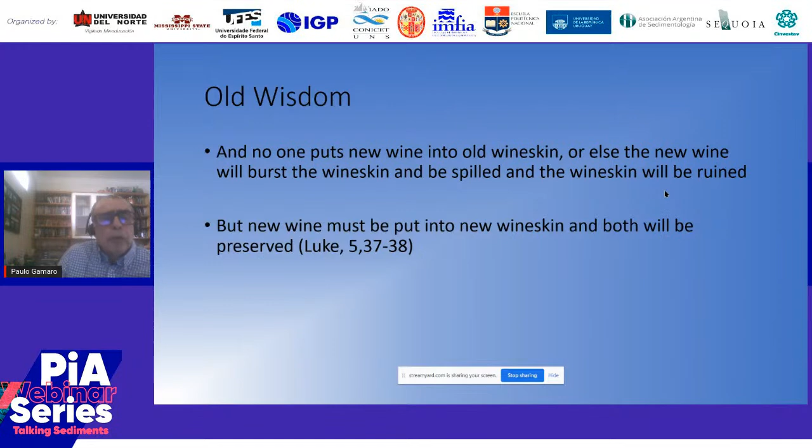Luke 5:37-38. Why did I put this? Because if we are going to use new techniques with the old rules, those old rules are probably not enough for us to understand and use them. It's like I have a cannon, a powerful weapon, but I don't know how to use it. I just know how to throw stones.

So we have to start seeing a revision of the old techniques. We have to see how we do things. When I say old techniques, I'm not saying they're completely unactualized, but I mean it's old because there is a new one. It doesn't mean it's not good enough. Again, it's still good for the use we used to do in the past. But when we have new techniques, this becomes old.

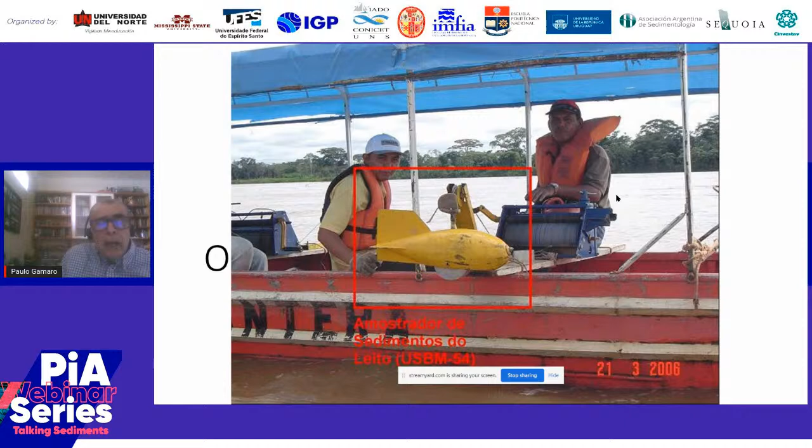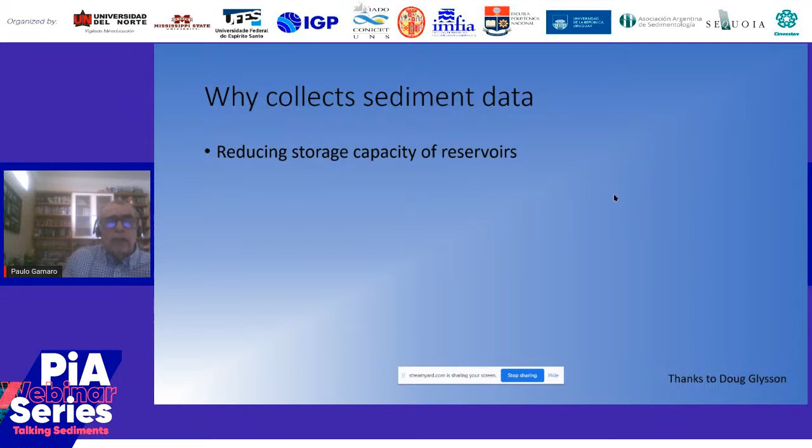So here are some samplers for bottom sediment. We have to come back to why we collect sediment data. First of all, sediment reduces storage capacity of reservoirs, and we are seeing this many times. This is increasing in our world. Why is that? Because human beings are changing the environment, and the sediment is going faster and faster to the river, to the water bodies, and so it is reducing or even completely turning the reservoir unusable.

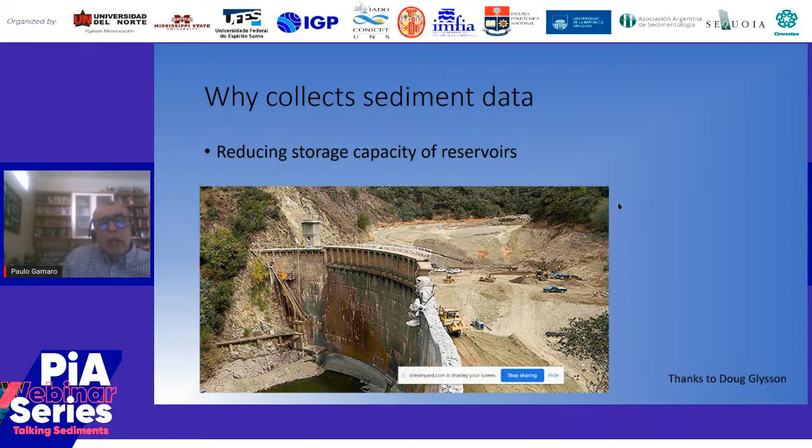Also, the sediment causes changes in channel configuration, slowing or halting either temporarily or permanently plant growth when deposited on productive land. Right now, when we see that the population of the world is growing and growing, we need more and more plant growth and yields and things like that. And sediment could ruin this in the long term.

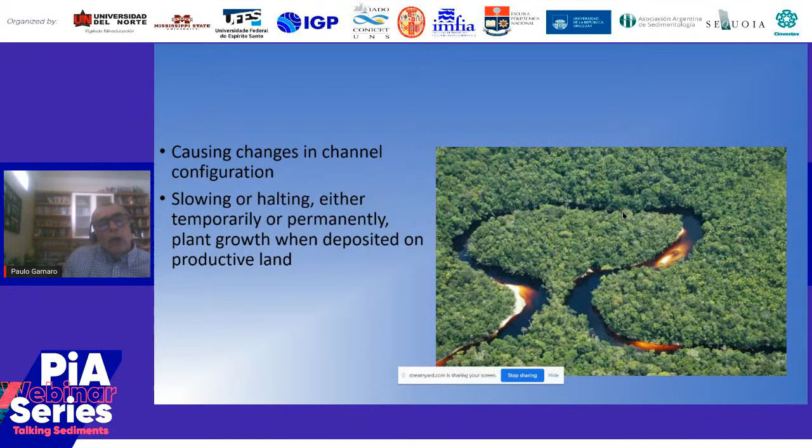We also have navigation problems here where I live. I live at the confluence of the Paraná River and Iguaçu River in the south of Brazil, bordering Paraguay and Argentina. We can see a lot of yield of soy, corn, wheat being transported, and this transportation comes by the river. Also in Paraguay, most of the transportation comes by the Paraguay River.

So we can see a lot of problems there, like sedimentation in the middle of the river where the barge couldn't pass by, the barge had to stop, and we can lose millions of US dollars every day.

So what do we need sediment data for? We need to understand how it works. First of all, the time distribution of sediment concentration and transport rate in a stream. We have to evaluate the sediment yields. We have to evaluate the erosion and deposition in channel systems, like this one I just showed you. The amount and size characteristics of sediment delivered to a body of water.

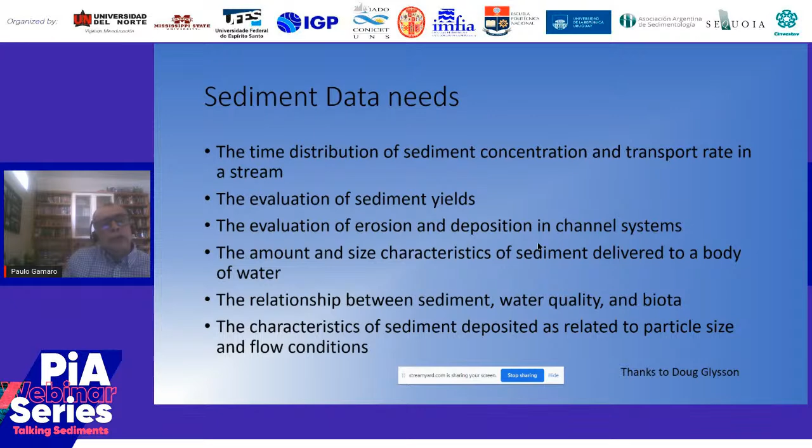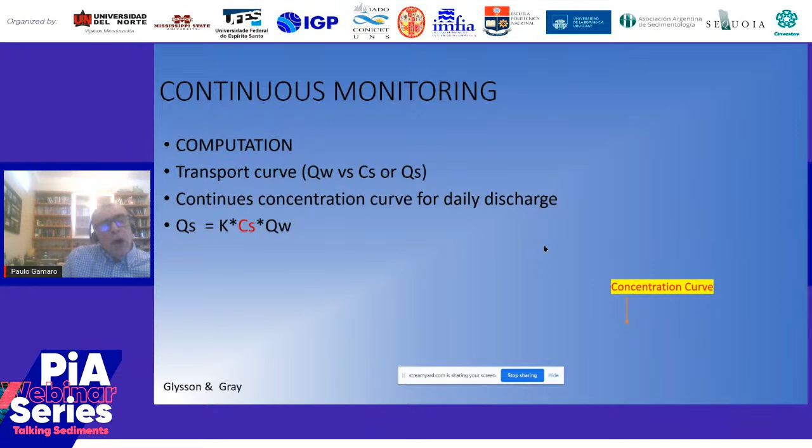So we have to monitor continuously. To monitor continuously, it's completely impossible to have measurements every day, every moment, because of time and because of the money that we spend to do this. So we use the computation of a transport curve or sediment curve to continue monitoring daily discharge of sediment on a daily basis. So here is an example of a water hydrograph and the sediment curve here.

This is in the middle of the Paraná River, just upstream of the Itaipu Reservoir. So let's see the difficulties to collect regular sediment data. We need a representative sample, which requires selecting a good site and understanding its characteristics, the temporal variability, the spatial variability, and sampling frequency.

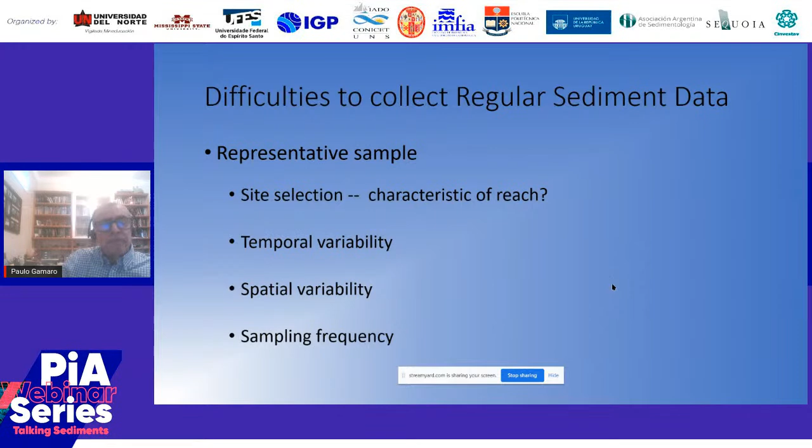So I'll show you some site characteristics about depth, which would be a problem to collect sediment. This is a very unusual place, in the Amazon River at the Itacoatiara station. We can see the depth is about 100 meters, and we have a lot of turbulence at the bottom that could affect the equipment's measurements. In this case, it's a very big problem to collect sediment with old mechanical meters.

The width is also about 2.5 kilometers wide. It's a very complicated situation for our measurements. And this is not only the Amazon River, but the entire Amazon basin. We have to face this to collect regular sediment data. Even in the Paraná basin we have this kind of problem, in the Paraná and some of its tributaries.

High water velocities, we can face velocities of about 2.5 meters per second. So when we are descending our mechanical meter, we have problems, especially in these high velocities. These high velocities are not only usual for the Amazon basin. We can find high water velocities in the Paraná River, Iguaçu River, and Paraguay River in some conditions, flood or semi-flood conditions.

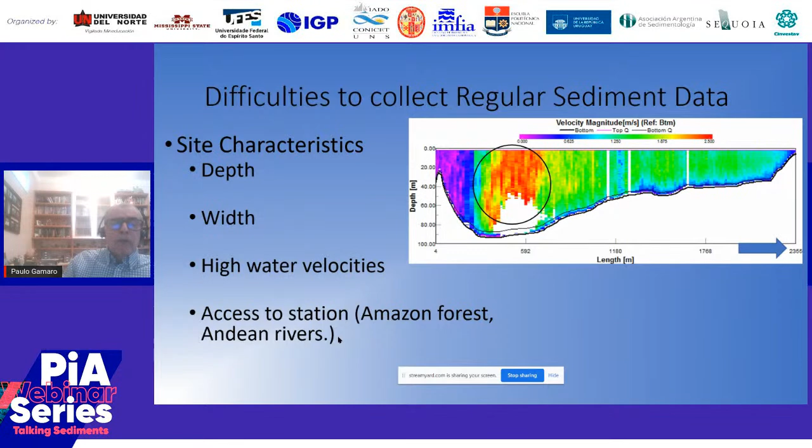So what we have to collect is a representative sample, a characteristic of the sample that is proportional to its occurrence in the local environment at the time of collection. This means every sample I collect should be proportional to the place where I'm measuring. A representative suspended sediment sample will have a sediment concentration and size distribution equal or similar to that averaged over the stream cross-section when the sample was collected.

It looks simple to do this, but when you go to the field, some places are very unusual and complicated to get a representative sample. Here is a well-known picture of different sediment diameters and how they occur in rivers: silts, fine sand, very fine sand, medium sand, and so on. It's well known.

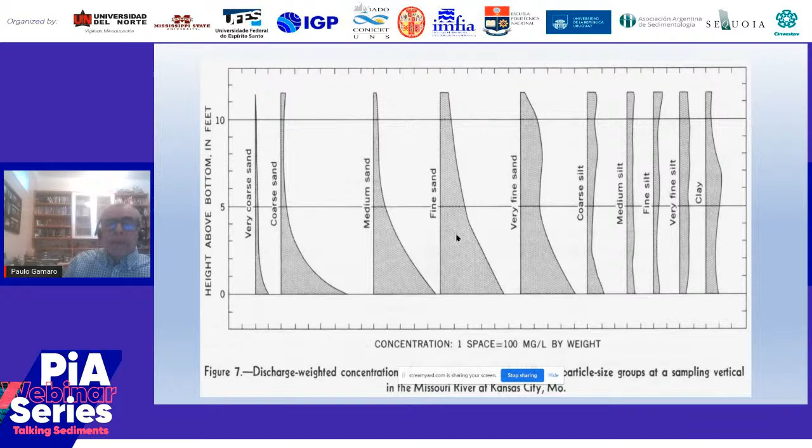We also have to consider that for silts and fine sediment, measurements at the surface don't differ much from the mean of the vertical profile. If we divide the mean concentration of the vertical by the concentration at the point, it should be around 1 — the closer to 1, the better. So you can see that for finer sediments, it's not difficult, even at 5 feet depth.

But things start to be completely different when we have coarser sediment like sands and fine sands. At the surface we see this concentration, and here we have the mean concentration in the vertical. We can see the quotient is about 5, 4, 1.5, 1.4, 1.7. This means it's not enough for us to just collect samples at the surface of the water.

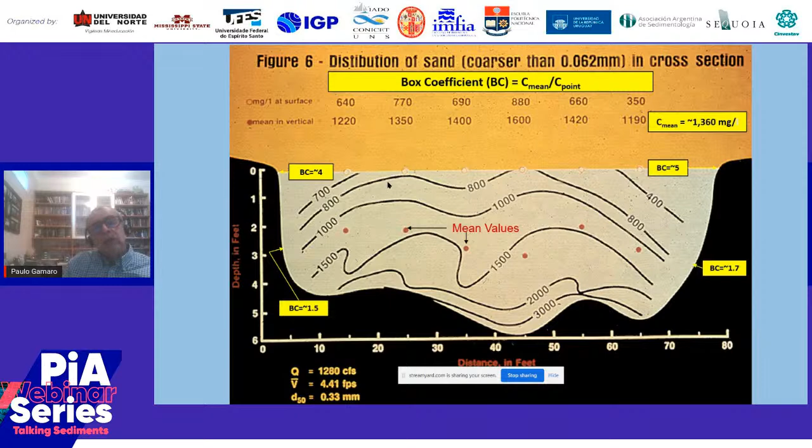What does this mean? It means that at many stations we visit every 3 or 4 months to do a complete sediment measurement, during this time someone goes and collects only a surface sample for measuring sediment. In rivers with coarser, sandy sediment, this is a big problem, a big error. I don't know about the rest of South America, but in Brazil, Paraguay, Uruguay and Argentina, we also have a lot of rivers with a lot of sand. So it's a problem to measure more frequently, and this is not always possible.

So we also have to see the relation between suspended sediment and concentration, and the relation with depth — turbulence maintains sediment in suspension. Fine sediment tends to be uniformly distributed in the water column. The concentration of coarse sediment may increase with depth, following Stokes' law.

It's okay, we can see this, but this is not very easy to understand in big rivers like the Amazon basin, the Paraná basin, and things like that. The sediments may be non-uniformly distributed in the cross section. This may be due to incomplete mixing, inadequate mixing time, weak turbulence, density gradients, and everything like that. We also have to understand the relation with the season, the flow history, man's work, and the changing environment around our section.

We can see some mechanical samplers. Here is one of the rivers of the Amazon basin, the Madeira River, one of the rivers that carries the most sediment in the Amazon basin.

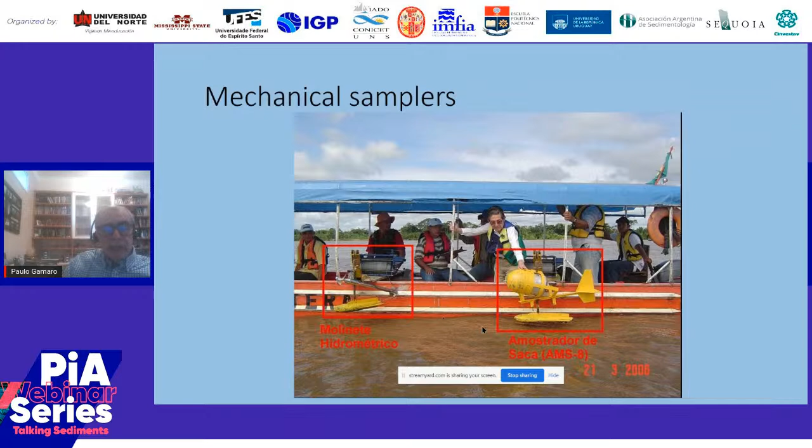We can see more samplers, and we can see that we have some boats not adequate for these measurements in low flow, low discharge. It's not possible to measure with this kind of boat in high discharge.

The other problem is when we are in the middle of the measurement, anchored in our boat, we start to measure, and some soy barge comes, and you have to move very quickly to not be hit by this barge. Or a ship - in the Amazon it's very common for big ships to cross the river during the measurements and things like this.

So, problems: a wide river sample may not be representative. When I say wide river, I'm talking about more than 2 kilometers wide. I give an example of the Solimões River, one of the tributaries of the Amazon.

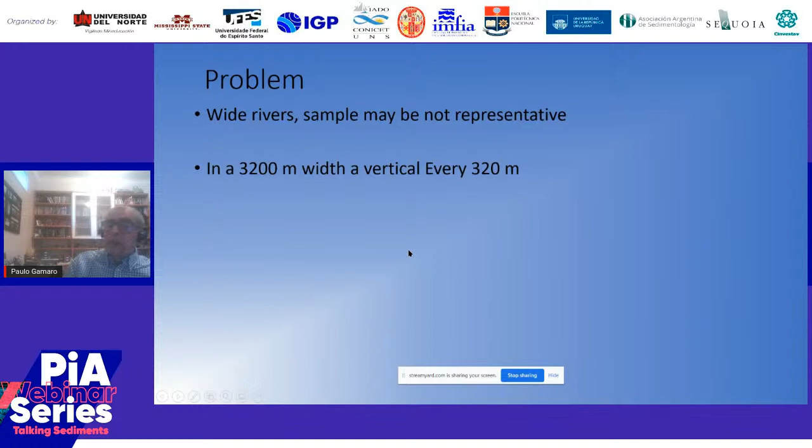We have a problem with measurements - we do not measure as much as we need, especially in South America. I don't know much about Colombia, Venezuela, and Peru, but I know about Brazil, Paraguay, Argentina, and even Uruguay. We're not measuring because we have problems with budget, low budgets for this. We have few technicians, few teams to go measure all the rivers, and we also have locomotion difficulties. We sometimes take many days to arrive at one station, especially in the north of Brazil.

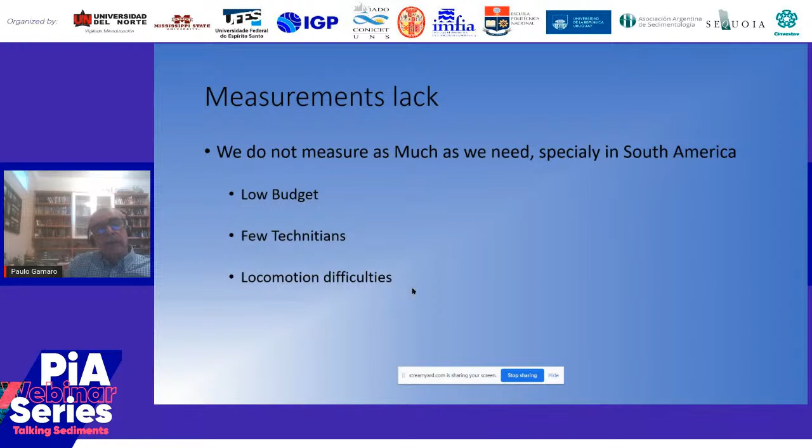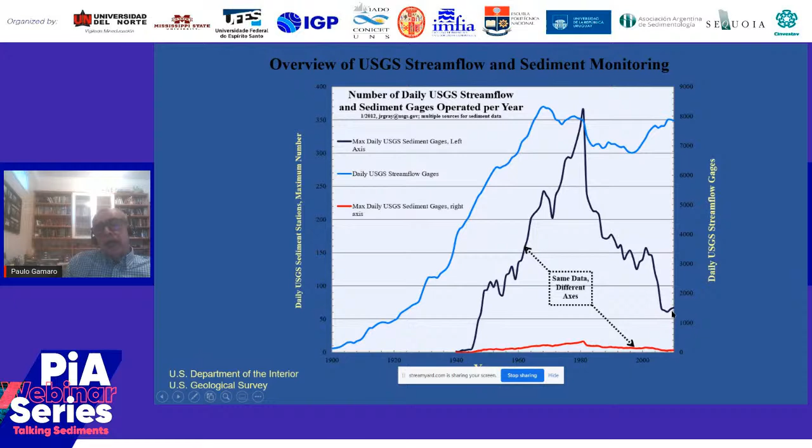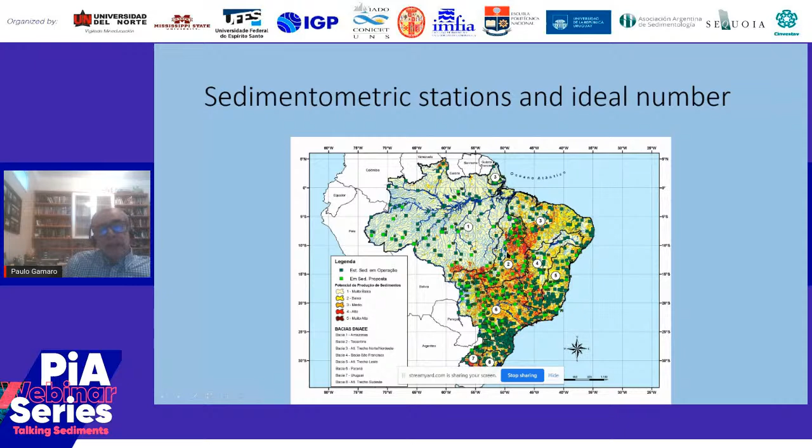I talk a lot about the Amazon and the north of Brazil rivers, because they are bigger and need more data. I bring this map showing the sediment stations in the Amazon region, and it's not enough.

We don't measure regularly. What do I mean by regularly? It means I would like to see my network being measured every, let's say, once every two months, but that's not true. We have a lot of difficult access, as I already talked about.

Here we have Manaus, the capital of Amazonas state, and to arrive and measure at these stations can take about 10, 20 days, depending on whether the river is in flood or not, navigating to arrive here. So it's a big problem.

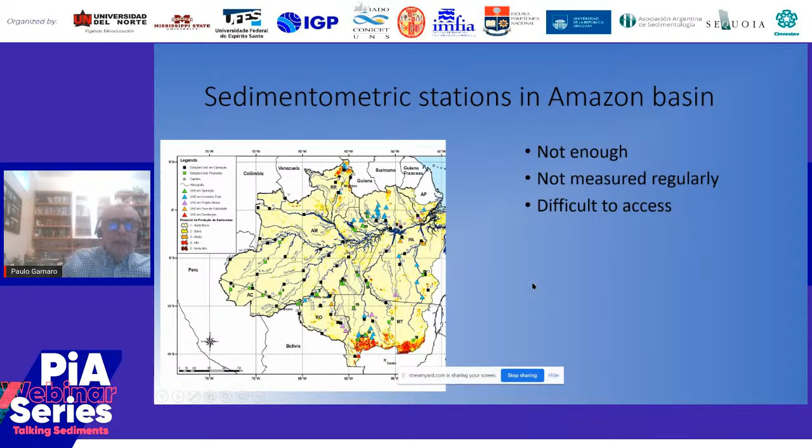Then new technology arrives and you say, wow, my problems are solved. I don't have to have any problems with mechanical meters, I don't have to have any problems with my sediment collection data. So, can we relate surrogate parameters to sediment? Promising techniques - backscatter from acoustic velocity meters, laser diffraction, turbidity - may work well when the sediment-flow relationship is poor.

When my curve of sediment isn't good enough because I don't have a lot of measurement, these techniques could work better. But this is the question, very important: do we really understand that new technology brings new concepts to add to old ones?

It's not straightforward to measure and have sediment suspension concentration. I can't just see my equipment and say, oh, we have this concentration or that concentration. We have to calculate, we have to work on the data to get the concentration.

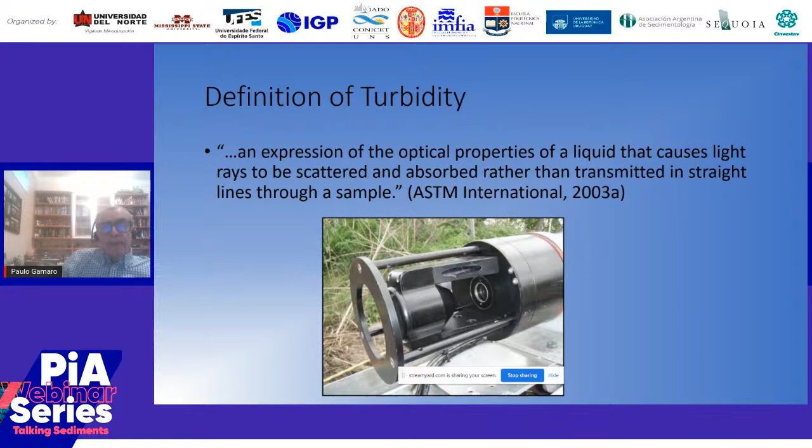We have one here. And what are the factors affecting measurements? These factors we have to take care of when we establish a station to use these turbidimeters: the particles, the color, the light source, particle settling, mechanical sample problems, numbers and configuration of the detectors.

And we also have to understand the turbidity limitation. Each regression model is site-specific. I can use one instrument at one site, establish a correlation with concentration and sediment in suspension, and take this instrument to another site and use the same regression - this is not possible. We have to start all over again.

Turbidity values from different sensors are not equivalent. We have a lot of turbidimeters from different manufacturers, and they are not measuring the same values from the same place at the same time. If we put 1, 2, 3 together, they are different. This is because if I use one turbidimeter in one place and another turbidimeter in another place, the regressions are completely different. But if I keep this turbidimeter in the same place, in the same station, and establish a correlation, I can use it if it's a good place.

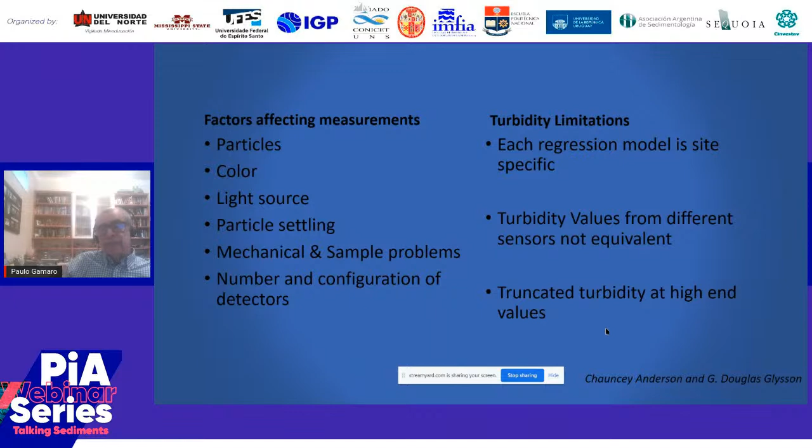Here's one of the first analyses. It's back to April 1999 from Paul Buchanan from USGS in San Francisco Delta Bay.

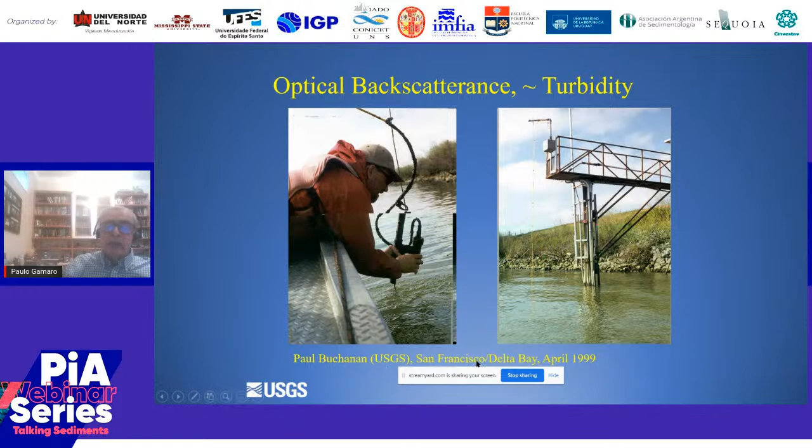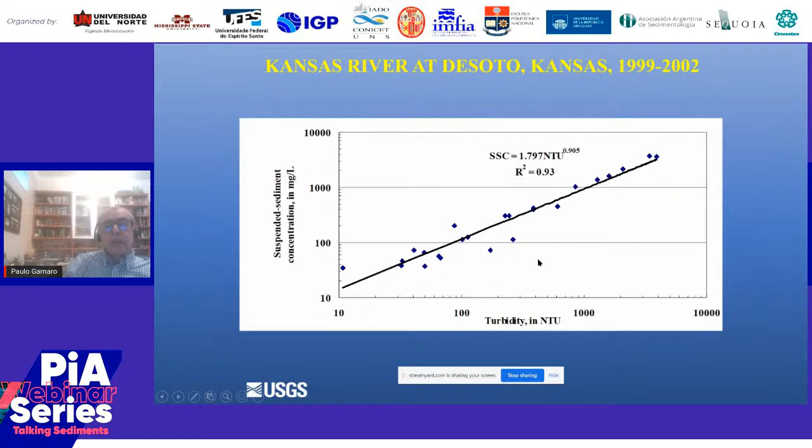This is the correlation between the suspended sediment concentration and the turbidity. We can see it's a very good one, so we can use it, just reading the turbidity, to find out the concentration.

The problem is where I am collecting data, because I have seen in some places people putting their equipment on one side of the river like this, thinking the correlation for the whole river will be okay. This is not good. USGS says that when measuring with mechanical meters and samplers for sediment, you also have to put your turbidimeter in each one of the verticals to establish the correlation.

So this is what people from USGS found out about turbidimeters. The positive thing is they're very cheap, it's a relatively mature technology, it's the most common surrogate technology, we find a lot of them. We have a concentration at a point, and we have contact with this equipment.

The negative thing is it has a small operational range, so I cannot use one of these in a river like the Paraná River, because I would measure just a point in a river with a width of about 1 kilometer. It's not possible. It's prone to fouling, and we have to do high maintenance, cleaning up the instrument every now and then.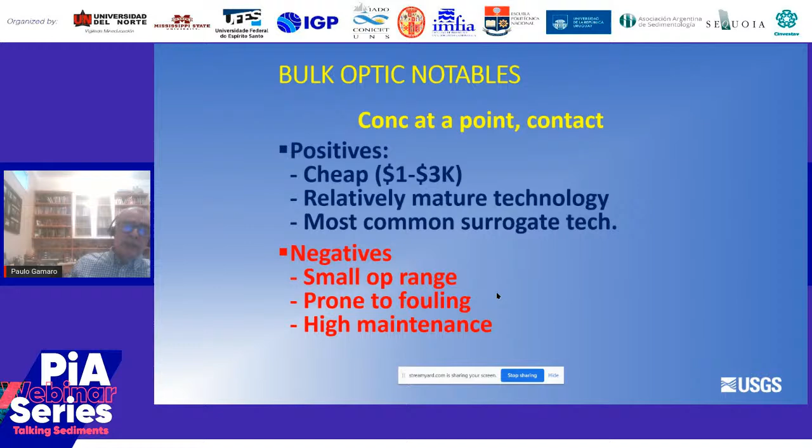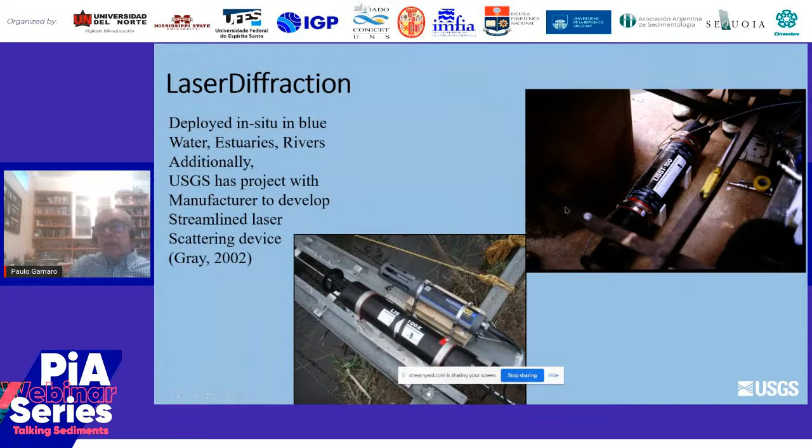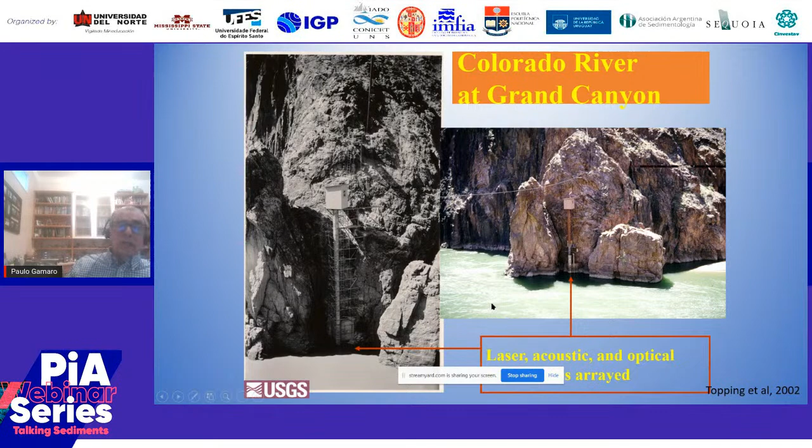Laser diffraction: here we have some tests from 2002 used by USGS, by John Gray. We can see the instruments here and here. It was placed in the Colorado River by Topping, and they used it to establish correlation there. We can see the results - it's, I would say, a good correlation.

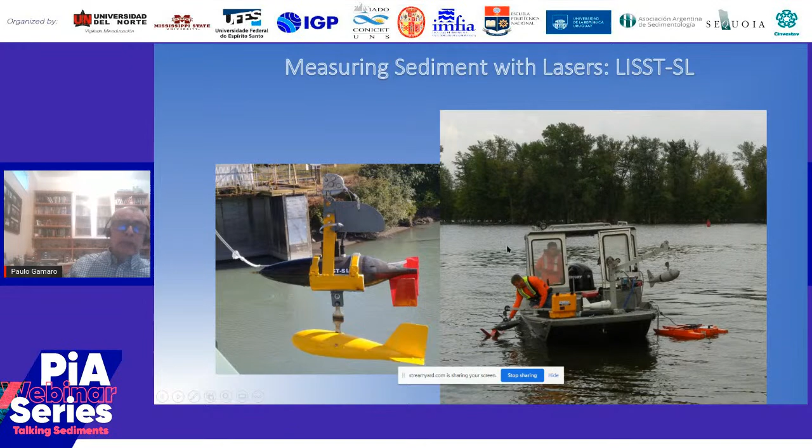And also we have the LISST SL that we can use in every vertical, which can give us particle size distribution and concentration at a point by contact. The positive thing is the particle size distribution concentration is proven in marine environments.

This is back to 2010 or so - it's been proven in rivers as well, as we'll see. And the LISST SL is isokinetic. The negative is the operation range is a function of the particle size distribution, and could be limited.

I saw one problem here in the Madeira River. We have a very, very high concentration, and then it got clogged. But it's a place that's very complicated to measure, and it might foul in remote use mode.

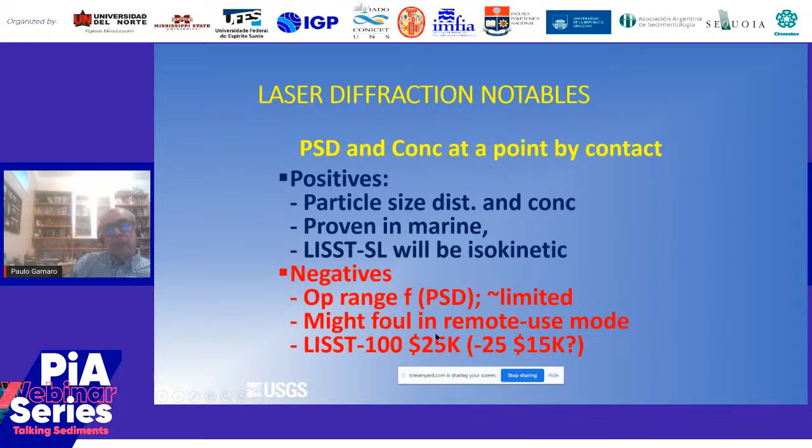And about the price, I don't know if it's still this price. It probably shouldn't be, but it's still a little bit expensive.

Here is an experience from 2011 in Illinois, and we can see the results here. The pump samples are the samples with mechanical meters, and with the LISST in one single vertical and flows.

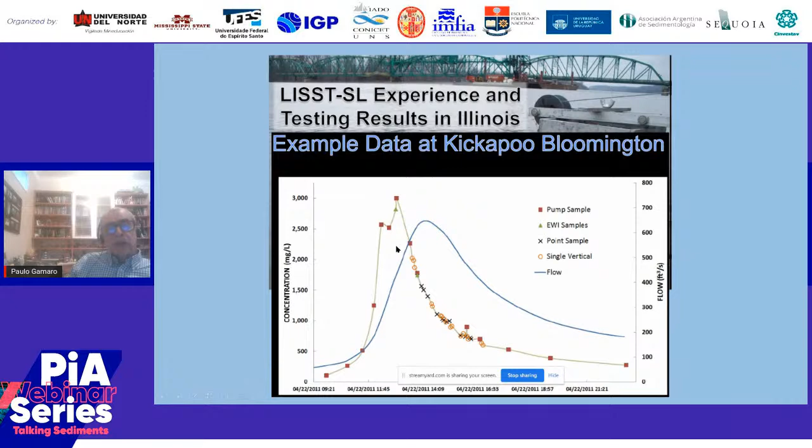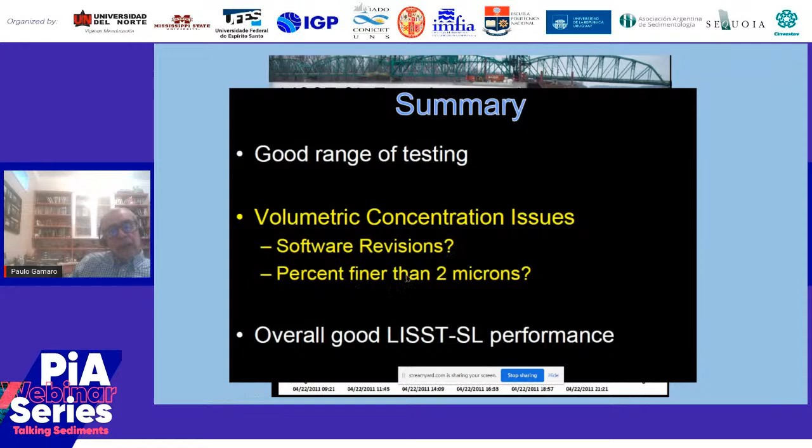And this is a summary. They did a good range of testing: volumetric concentration issues, software revisions - that was back then, I know they already changed it - and percent finer than 2 microns. Overall, good LISST SL performance.

So now I'm going to talk more about what I have good experience with: acoustic backscatter.

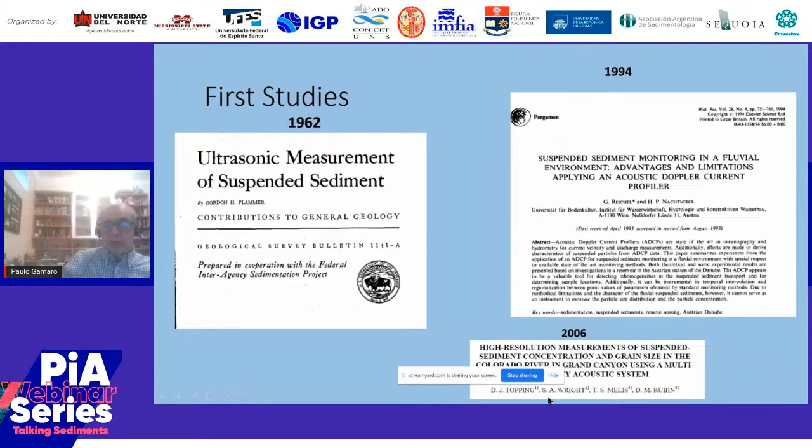Well, the first study about using ultrasonic for suspended sediment goes back to 1962 - you can see here, Gordon Flammer. We also have a lot of studies from 1994, Reichel and Nachtnebel, and also in the Colorado River in Grand Canyon, using multi-frequency acoustic systems by Topping.

The implications: increased accuracy, greater resolution, less sampling needed, immediate information. This is what we can think about using acoustic backscatter to estimate suspended sediment concentration. It's been in practice for more than 20 years. The acoustic Doppler current profiler measures backscatter, or the strength of the reflected signal from particles in suspension. The magnitude of backscatter depends on ADCP frequency, suspended sediment concentration, and size of the particle.

So I'll show some important aspects. I'm not going very deep into the technique because we don't have time for this, but I can show you some things and some occurrences, especially in the Amazon basin, where this will help us more.

Important is the signal correction, or the intensity of loss - we have beam spreading, water absorption, sediment absorption. This is the equation: so when our ADCP gives the intensity of the signal, it goes down because of this loss, absorption, water absorption, sediment absorption. It goes decreasing the intensity. Using this equation, we can get the backscatter here.

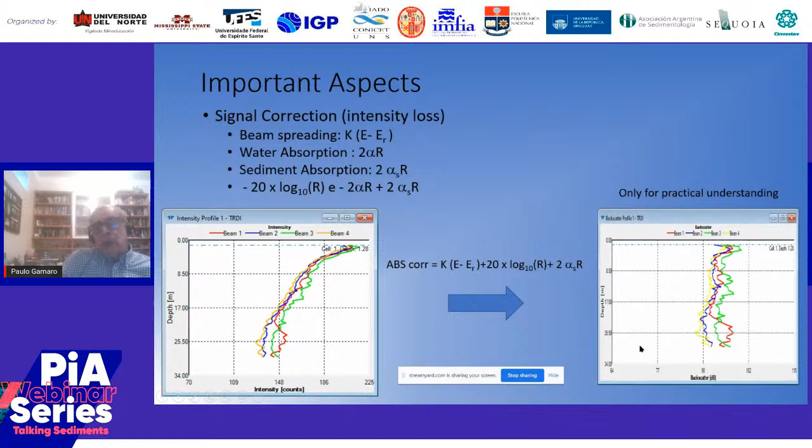This figure is just for practical understanding - it's not really a correction with this equation here, but to understand the difference we can see it, because one of those measurements is measuring counts. Counts is one measure for very, very high values measured by the ADCP, or very, very low values ADCP. You can transform it into decibels, so you can use the equations to find out the sediment concentration.

So I put together a summary of what we have to do: acoustic data processing. We collect raw backscatter in multiple cells.

We subtract the noise and convert to decibels. We calculate near field, because close to the equipment, the spreading of the signal is not the same as the rest of the vertical profile. This is due to the function of the instrument. So we have to calculate the attenuation of the signal, the attenuation by water and by sediment, and correct for absorption by sediment. Then you calculate the average backscatter and relate it to the sample data.

Which is the sample data? Sample data is the data from mechanical meters.

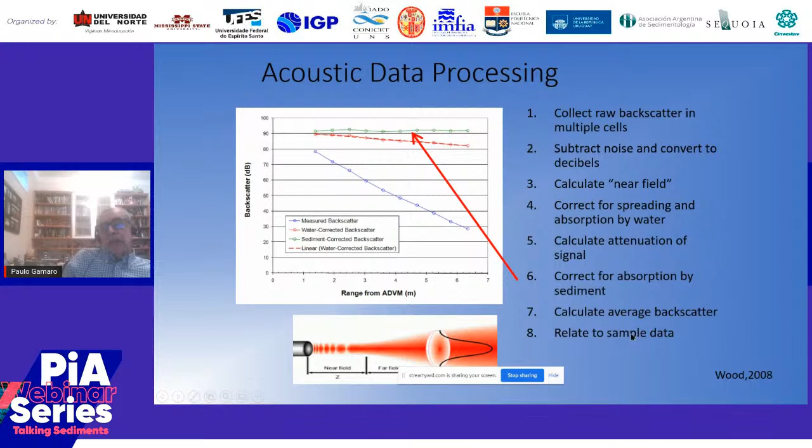In 2012 a working group evaluated some new technologies of the USGS, open to other scientists. The advantages are high temporal resolution if the equipment is fixed, high spatial resolution if it's mobile, for example crossing the river with an equipment, improved accuracy and reduced cost, concurrent velocity measurements with discharge. If I measure discharge, I can also use it for sediment. It's highly robust in the environment, ubiquitous in stream flow monitoring, has a large sample volume, and multi-frequency may indicate sediment size.

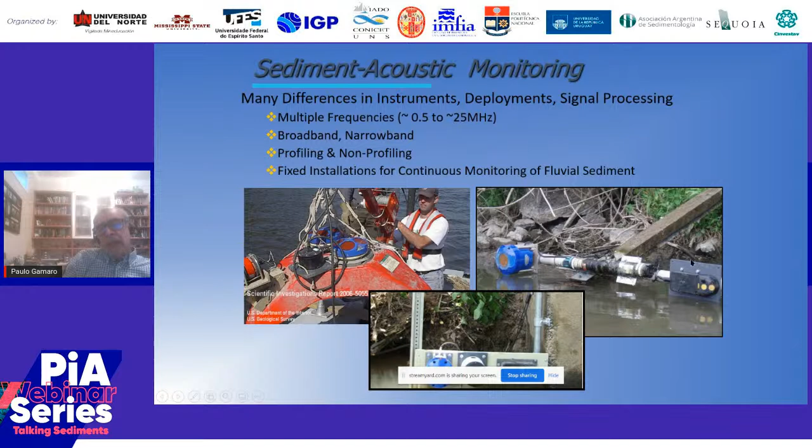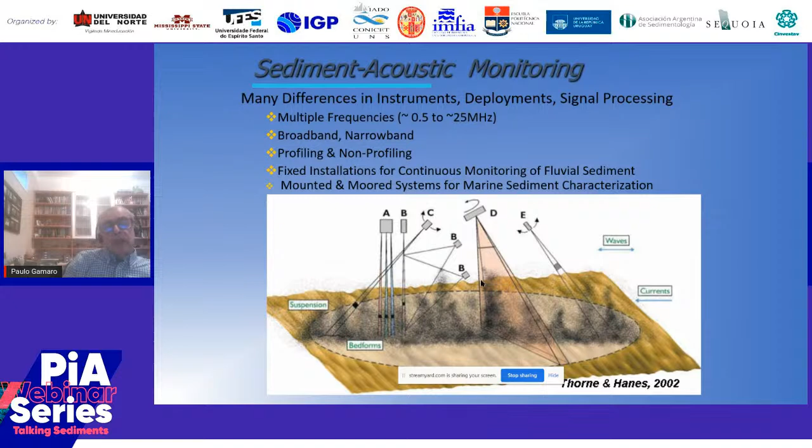So there are many differences in instrument deployment and signal processing. We have multi-frequencies from 0.5 to 25 megahertz, broadband, narrowband, profiling, non-profiling, fixed installation, continuous monitoring of fluvial sediment. We have fixed installation in the bed of the river, fixed installation in the bank of the river, and measurements for wave currents, bed forms, suspension, everything like this. We have to deal with this to find out which is the best one for our stations, for our rivers, and then use it.

Well, let's look a little bit at some experience, side-look experience, a fixed instrument. We have one, a 500 kilohertz SL from SonTek. It was used in Itaipu Reservoir to give discharge and some data of sediment.

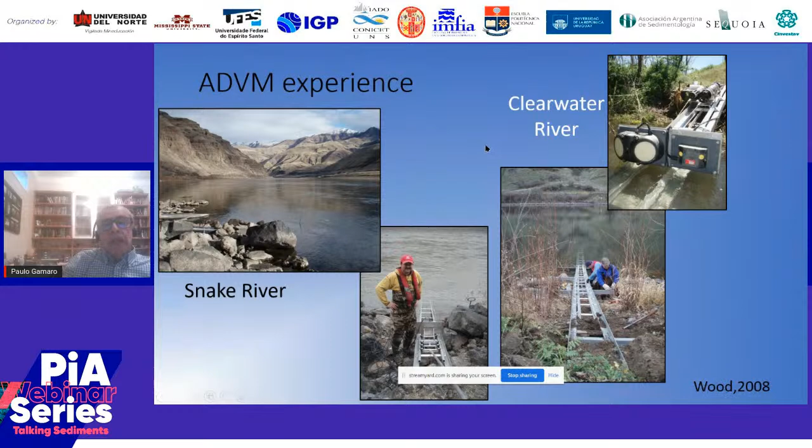We also have some ADVM or SL side-looking experience from Wood in Idaho, in the Snake River and Clearwater River. The range in sediment suspension concentration was 3 to 210 in one, and in the Snake River 7 to 389. Average percent of fines was 62% and 64%. Average percent of organic matter was 10% at high suspended concentration and 26% at low suspended concentration in one river, and in Snake River 4% at high suspended concentration, 17% at low.

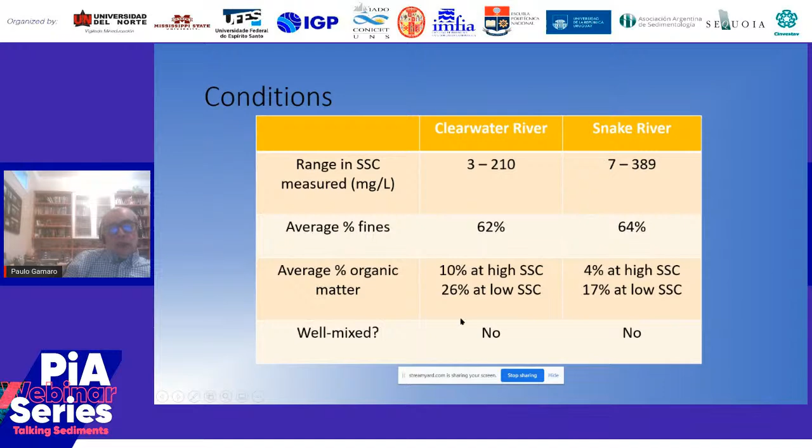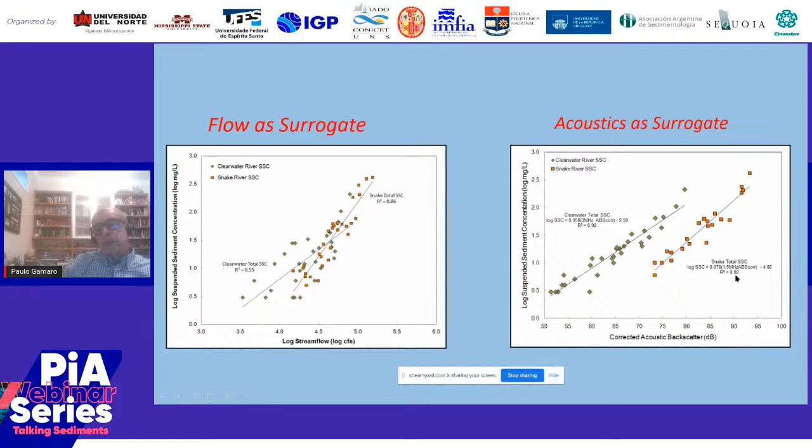This is using discharge as a surrogate for sediment, meaning using the concentration curve or sediment curve for establishing data. Using acoustic surrogate, we can see it's a lot better. In Clearwater where we found 0.55 with discharge, we found 0.92 with acoustics. In Snake River, with discharge or flow as surrogate we have 0.86, and for acoustics we have 0.92 R-squared.

So very good results from a lot of measurements, a lot of instruments used to find surrogate for sediment. The best one was acoustic backscatter with 3.0 megahertz in Clearwater. In Snake River results, the better one was 1.5 megahertz acoustic backscatter for side-looking equipment.

Here we have a graph where we can see this a little bit. The blue one is stream flow, and we have stream flow transport. With the 1.5 instrument we're transforming it into suspension concentration.

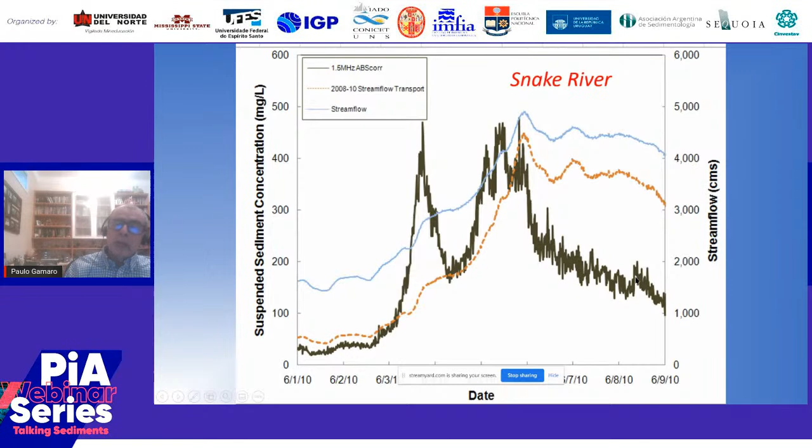As a summary of this experiment, acoustic is the best surrogate technology. Higher frequency works best, as we saw with the 3.0 megahertz, and we see the R-squared is 0.92 for both sites. With low maintenance we have data about every 15 minutes, for total fine and coarse fractions, we work with both of them. This improves the use of flow data over short and long time scales, improving our correlation.

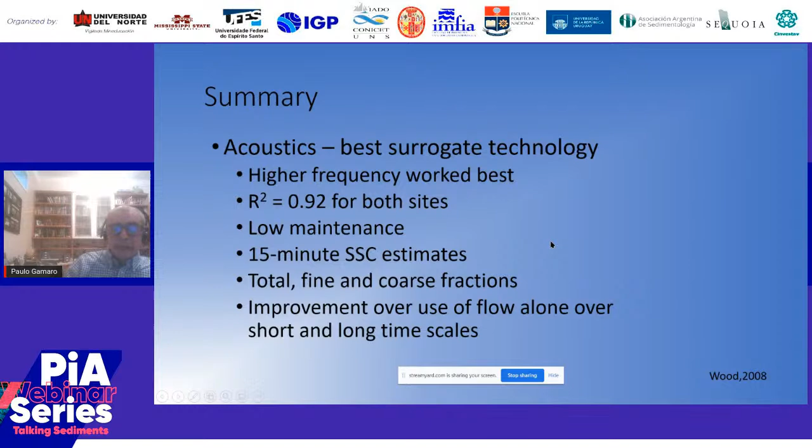Right now I want to bring you to visit the Amazon basin, going where we do have problems. We have problems not only with acoustics, turbidimeters, or laser diffraction, but also with mechanical meters because all here are huge. We have huge rivers, a lot of mass of water flowing, with high velocities, very high velocities.

I brought you here just a measurement. This is in the Amazon River mouth - not the real mouth, it's about 40 kilometers from the mouth of the Atlantic Ocean. We can see the velocities here, and the whole section has about 12 kilometers and takes us about 3 hours to cross.

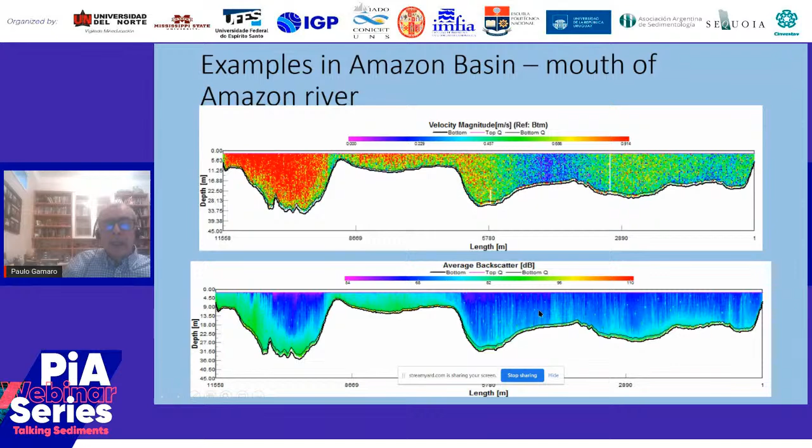We have here the average backscattering in decibels, and we can already have qualitative data of sediments. We can find out where we have less sediment, more sediment, and so on. We can also see these points here because we are using an echobathymeter, and it interferes with the measurements with the ADCP. This could be a problem - not for discharge, but for sediment it could be a very big problem.

We also have waters meeting. This is a very known place where the Solimões River, with a lot of sediment coming from the Andes, and the Negro River, with a lot of organic matter and almost nothing of sediment, meet. This goes for about 150 kilometers without mixing. So if you have to measure here, we have problems.

We can see here the backscatter of the equipment. This is the Solimões River, exactly what we saw, and the Negro River, a lot of sediment and almost nothing of sediment. So if I use the acoustic Doppler for discharge, I would have to split in two to use it. It's a big problem to use mechanical meters because of the depth I showed you before, and there's high waters in some seasons of the year.

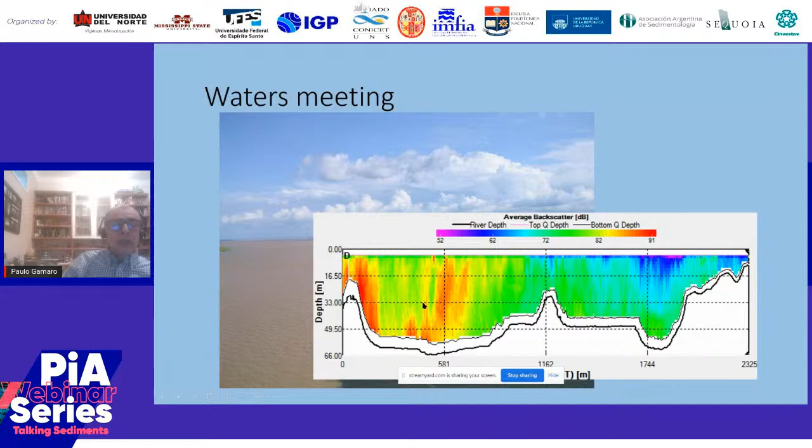Same place, same river, now we have 20,200 cubic meters per second, and we can see that the intensity of the signal is going down very, very fast. We have a lot of loss here because we have a lot of sediments, and when we transform this intensity in counts to a corrected backscatter, we can see that we have things not usual here - some kind of sediment, unusual, that puts this profile very down in decibels.

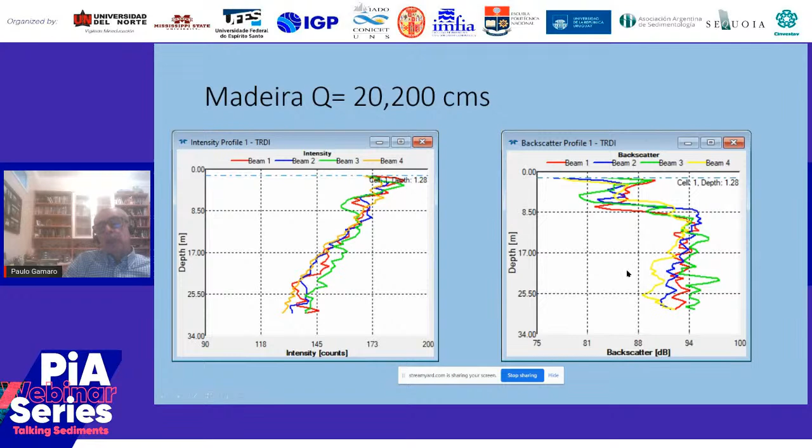And we go further. Now all the measurements before were using the 600 kilohertz ADCP, but right now we are measuring 47,500 cubic meters per second, and the 600 couldn't measure anymore because there is such high concentration that the signal couldn't reach the bed of the river. So we can't measure with the 600, we have to use a 300, and sometimes in the past we already had to use another frequency because the 300 couldn't reach the bed of the river either.

We can see now that when the sound touches solid, the count is 225, and it starts about 205 or something, and very quickly it goes to 178, then down to about 160 here. We can see that backscatter here, we have some loss, very high loss, because the instrument could be a noise, and then very quickly the backscatter goes down. So we can see from this data that we have most of the sediment up to 8 meters close to the surface, not in the bottom.

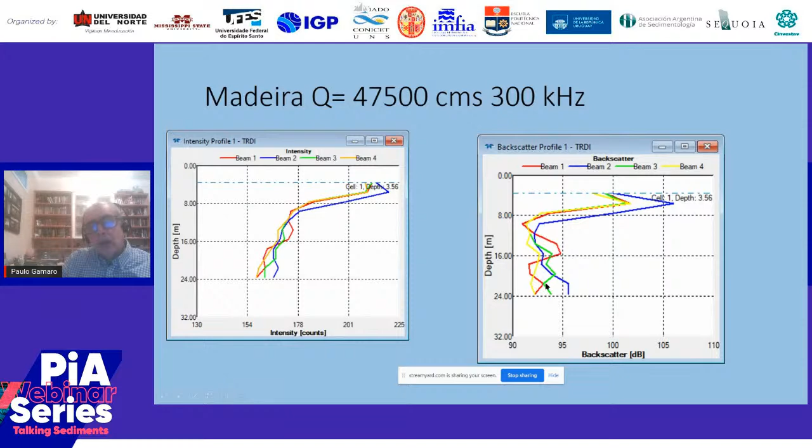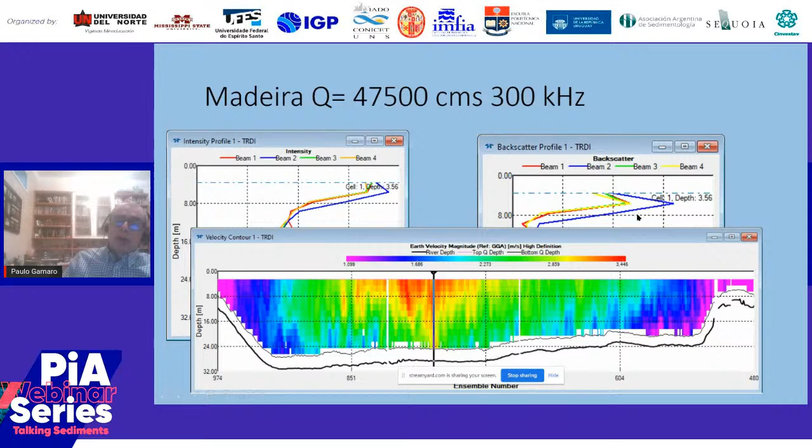And we can see here why. This is the velocities, and we can see that it's around 8 meters. So probably that's why we have a lot of sediment, fine sediment.

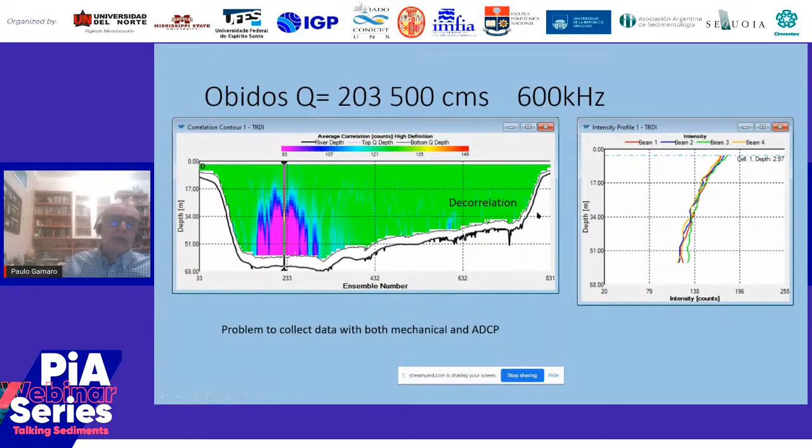Well, I could not measure with mechanical samplers here because of the depth, about 68 meters. But also I would have problems measuring with mechanical or ADCP measurements here. What I'm trying to tell you is that the Amazon Basin is a very specific place, a good place to do research on how to use these instruments. Probably the other place like this would be in China, in the Yellow River, or others in China with a lot of sediment.

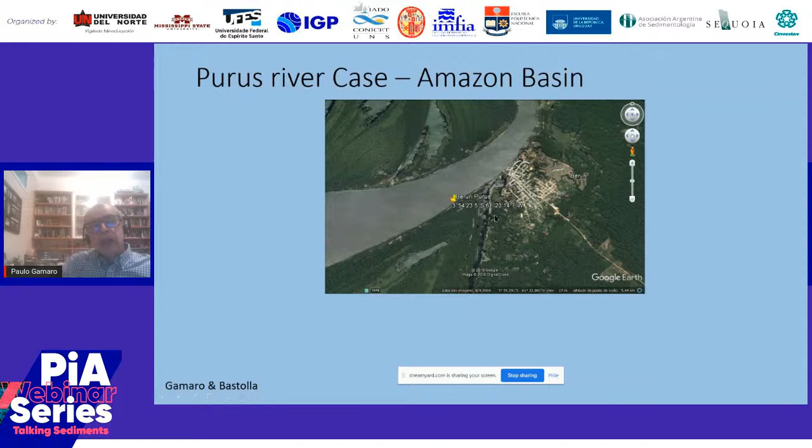I'll show you the Purus River, one of the Amazon tributaries. We made a measurement in Beruri Purus. It's a station, and the station is not very deep. This is not a very large river. It's 27 meters deep. There we don't have higher velocity.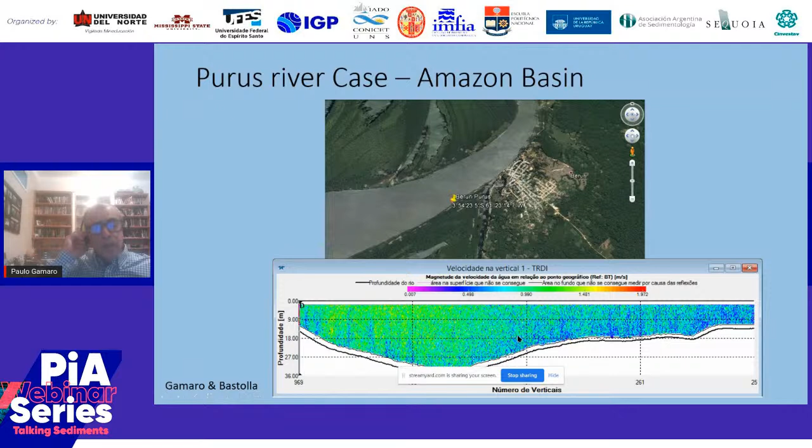The velocity is about 1.4, 1.5 meters per second, not high for Amazon standards. We can see the discharge is about 10,350 cubic meters per second, measured with 600 kilohertz, and we can see the intensity here. It's not sediment attenuation, it's probably some noise from the boat that the instrument is collecting.

We can see it goes from about 120 to 90 something. That's not a problem. What is strange here is when you apply the equation of the loss to this intensity, we can see that the profile gets stronger as it approaches the bottom of the river. Probably much sand, but at that time it wasn't - we were using mechanical meters and we didn't find sand.

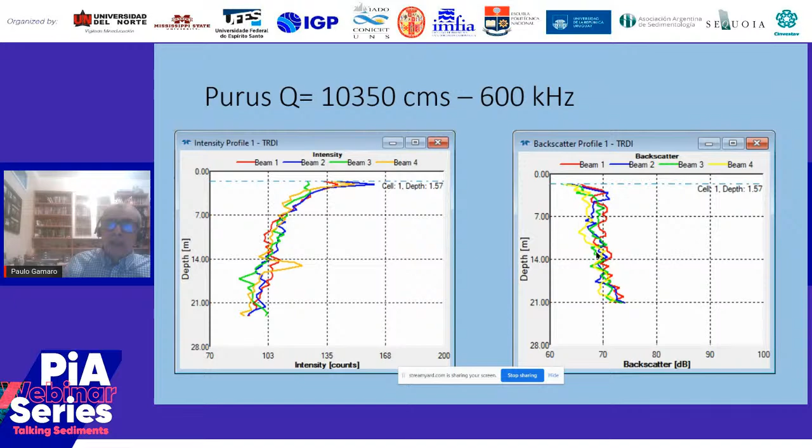Now we have the Purus with 28,560 cubic meters per second and 600 kilohertz. We can see that now we have a very, very high decline of the intensity of the signal in the beginning 8 meters deep, and then it goes down normally.

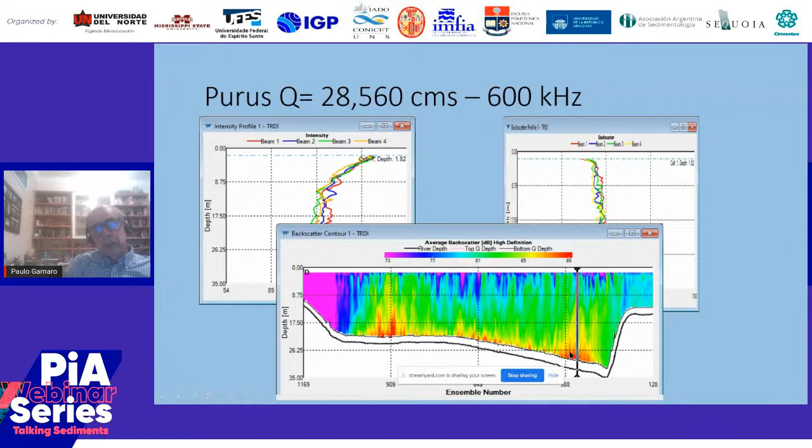But the same thing happens when we process data for backscatter - it goes slowly stronger as we approach the bottom of the river. We can see here the average backscatter of the whole cross section, and we see that we have a lot of sediment in the bottom of the river, a lot of reflections. That means a lot of sediment, probably in this case sand.

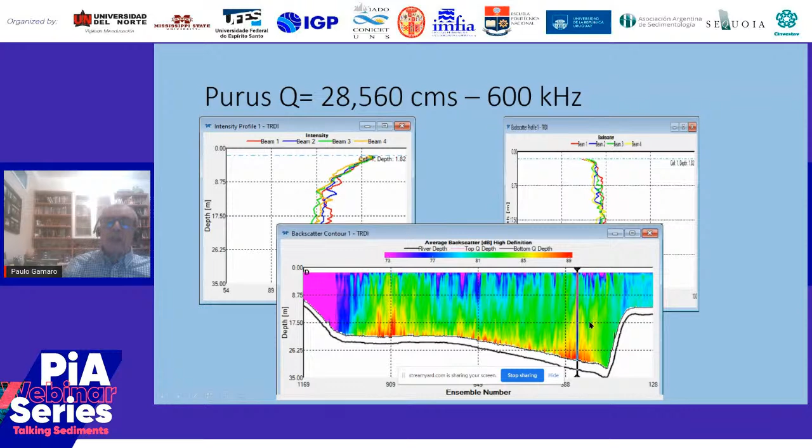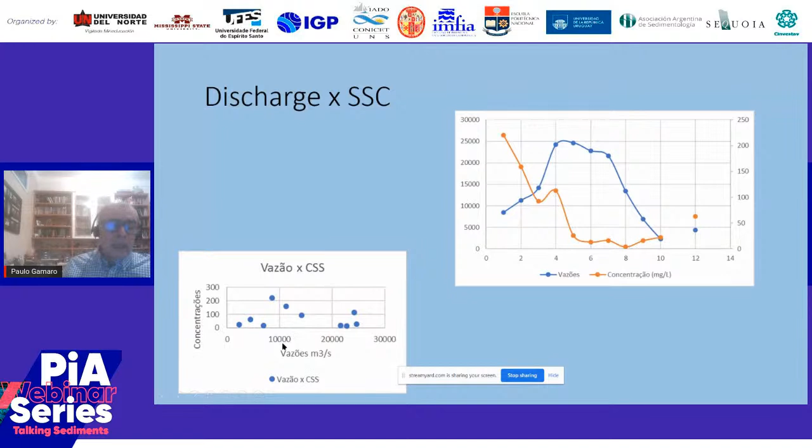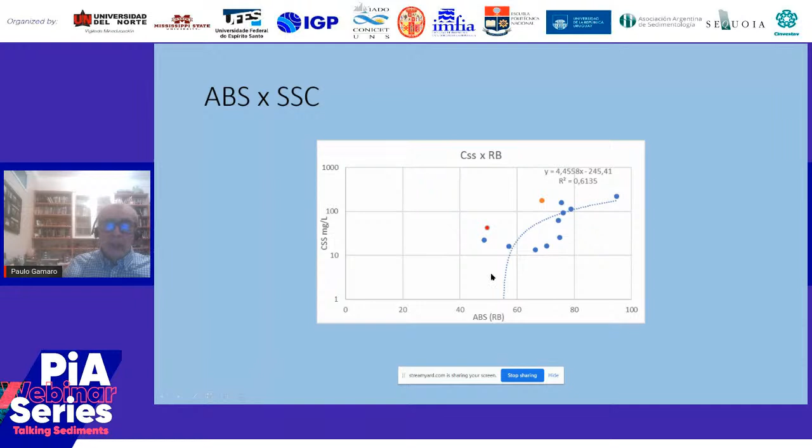So when we establish this graph between discharge and suspended sediment concentration, we can see it's unusual to see the discharge going up and the sediment going down. And the same thing we can see here. Why is that? When we establish a correlation, the correlation is not good - we can see the R2 is about 0.6. And why is that?

It's because one of the things we have to take care of when we process data with acoustics is the viscous and diffraction loss. There is a relation between the particle diameter and concentration and the size of the acoustic pulse, which means different results for sands versus for silts and clay.

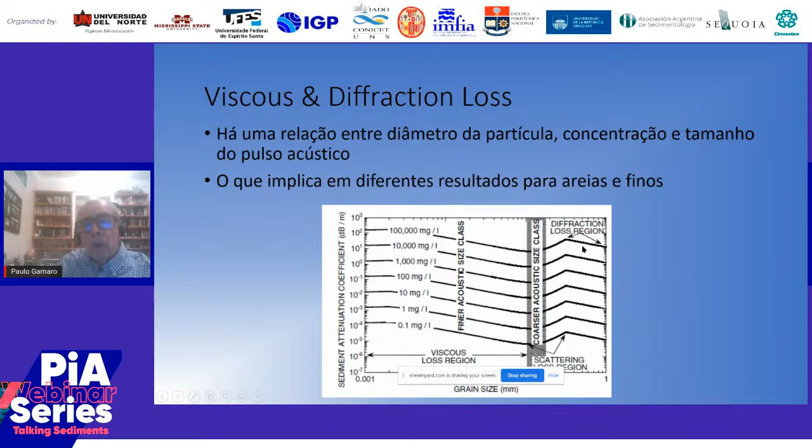This is a graph showing a viscous loss region in milligrams changing with the return of the signal in decibels per meter, and the scattering loss region is a diffraction region when the instrument reads the sediment as more coarse. So this is what's happening here - that's what we call the acoustic sensitivity, the relative sensitivity. It grows until 1, depending on the size of the particle.

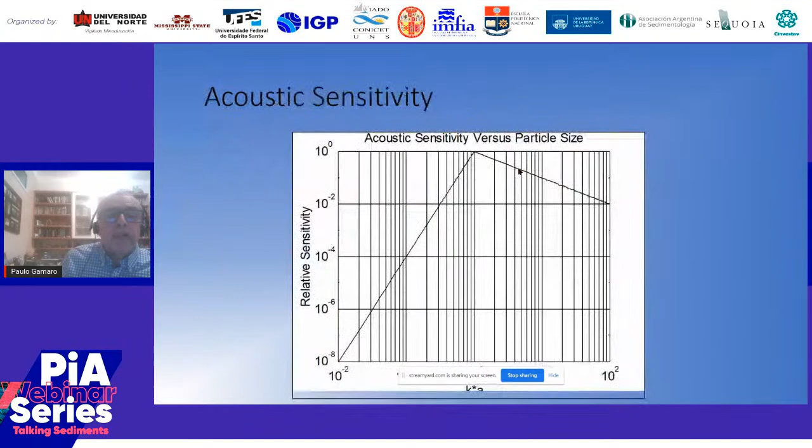We can see this in the data collected at this place - the viscous losses are much greater than losses by dispersion, by diffraction here. And every month we can see this. The other thing we can see is the signal is not coherent with the concentration, the suspended sediment concentration.

We can see right here in February that the absolute backscatter is about 75, and the suspended sediment is about 159 milligrams per liter. And here in March, almost the same, but the concentration is almost half of it. This river is very complicated because it has influence from other rivers, and those rivers contribute different diameters of particles and mix it, making it very complicated to establish a relation between acoustic backscatter and sediment concentration.

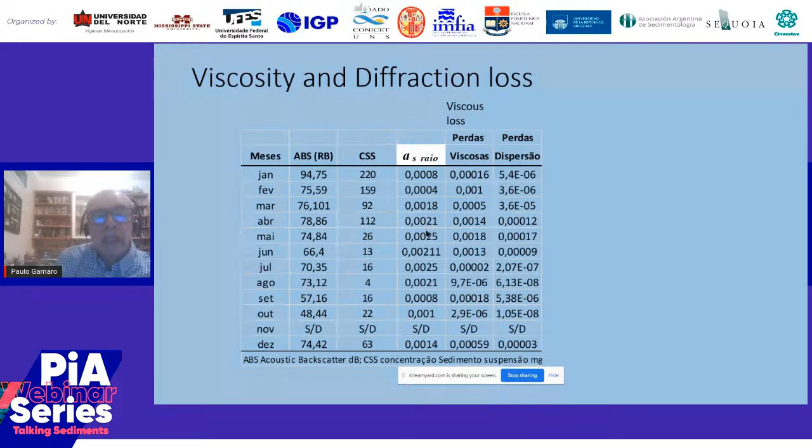I also want to show you - I don't know how my time is, but I'm almost finishing - I have to show you a study from Wood, Szupiany, Landers, and others in the Missouri River about using a multi-frequency down-looking ADCP.

Why a multi-frequency? Because with only one frequency we can only estimate, not truly establish, particle size. We need at least two frequencies, and by crossing each other, we can find out the particle size and establish a much better correlation.

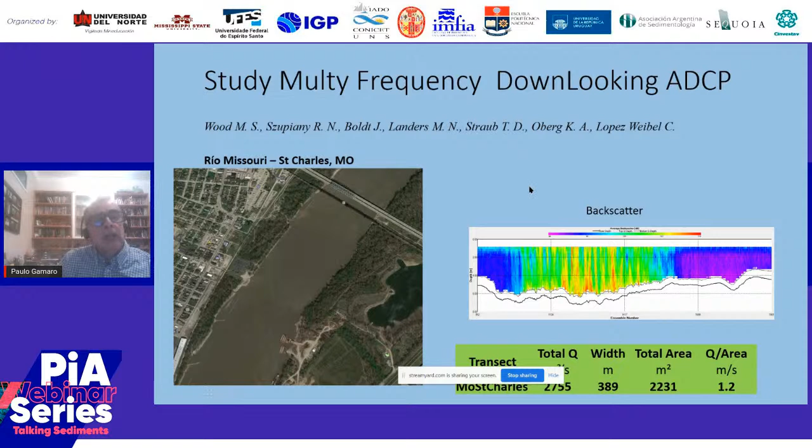This study was done in the Missouri River, where we can see for a 1200 kilohertz ADCP and a 600 kilohertz ADCP, the regression between loss and concentration at some points of the Missouri River. All of them have a very good R2.

As I said before, the higher frequencies respond better than lower frequencies. We can find here R2 of 0.887, 0.93, 0.87, 0.89, and also here with the regression with the 600, we see R2 values of 0.61, 0.7, 0.56, 0.6.

Conclusions of this study: strong correlation of acoustic intensity against suspended sand concentration. Similar results for both frequencies, despite the R2 being a little higher for the 1200 kilohertz.

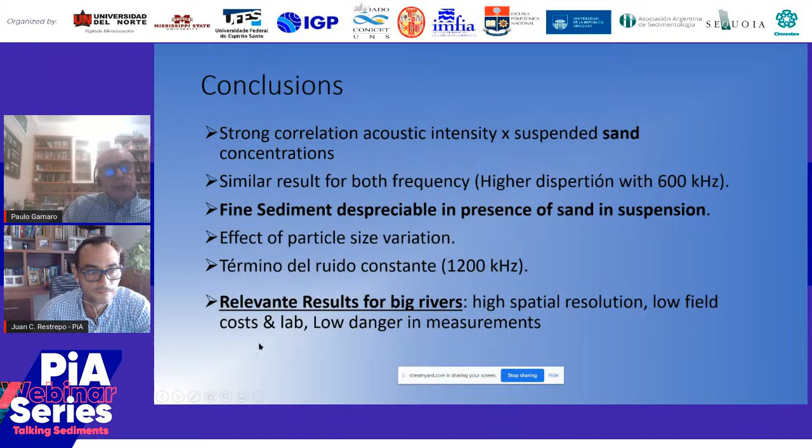I'm already finishing. So, relevant results for big rivers: high spatial resolution, low field costs, low danger in measurements, and in high water measurements we can use this.

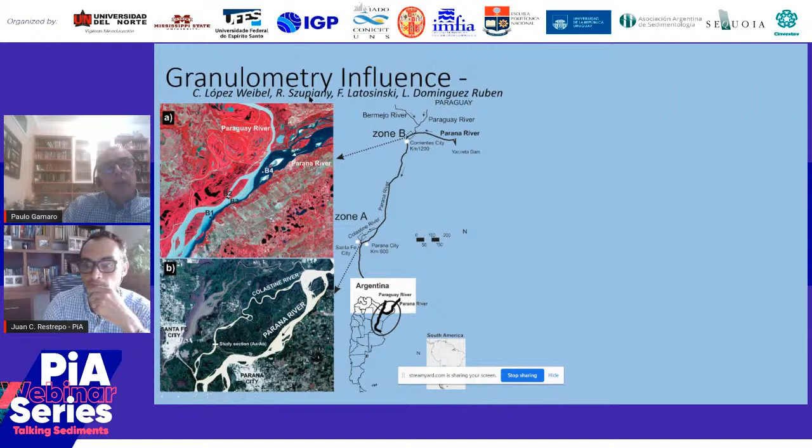And the last one is this study of granulometry influence in the Paraná River with López Weibel, Szupiany, Latosinski, Dominguez Ruben. We can see here the results with 1200 kilohertz and 600 kilohertz, high R2s.

So the conclusions for the whole presentation: each technology has its own limitation, but we have to test it in every place we are going to use it. Not every place is good for all technologies - that's easy to understand. Technology is opening new horizons to better studies and understanding of nature. Acoustic has the advantage of high spatial resolution. ADCPs are used frequently to obtain discharge data, so at least we can have qualitative data of sediment.

So thank you for your time. I hope I could give you some visual understanding of this, especially in big rivers.

So, questions? Oh, Paulo, yeah. Thank you for this survey of the measuring techniques. Very interesting. We have time for a couple of questions.

We have one from Philippe Raton: could you talk a little bit about the ADCP potential to estimate bed load sediment transport, especially considering the bottom tracking feature and the dune tracking approach?